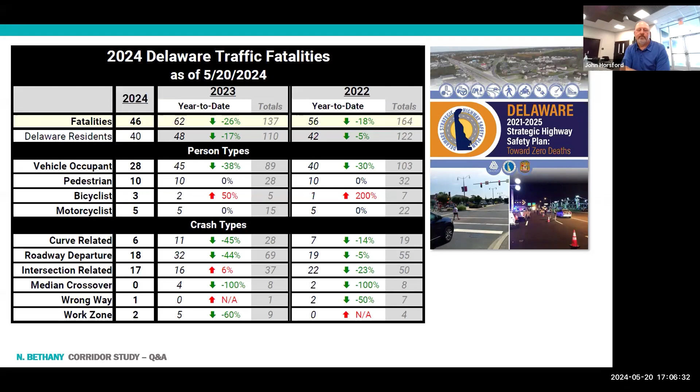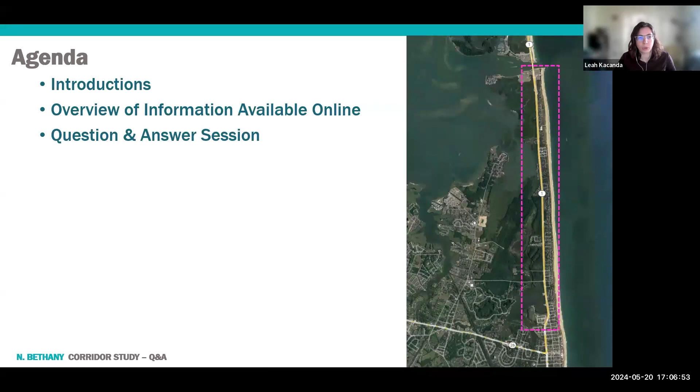So tonight, again, we're not going to go through the same presentation we delivered at the workshop, which is also posted online, but I do want to give you a high-level overview of what is available online, just to make sure everyone is aware of what they can find there, before we move into the question and answer session. But before that, I wanted to let you know who we have in the virtual room with us this evening, so we'll start at the top of the list.

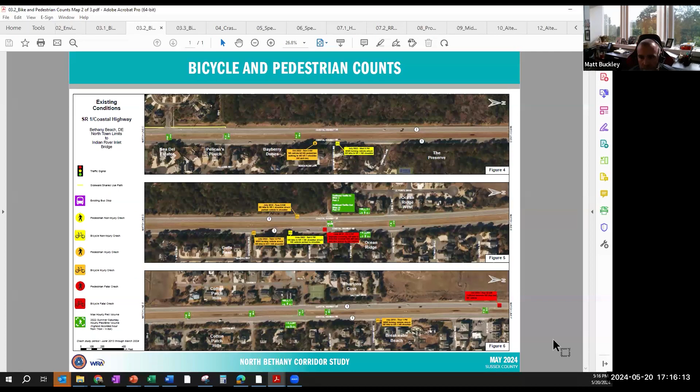It really comes down to the volume of pedestrians and bicyclists wanting to cross at North Fresh Pond, that's really the only location. The general rule of thumb to warrant a full red, yellow, green steady traffic signal is about 100 pedestrians and cyclists per hour. North Fresh Pond has about half of that, and Indian Harbor Village as well as the South Fresh Pond crossing are far, far below those numbers. So it really comes down to trusting the data: if a traffic signal isn't warranted, there are a lot of safety implications associated with installing one. Since volumes here, even at the highest hour in summer, are only about half of that threshold, that countermeasure of a steady traffic light is kind of off the table.

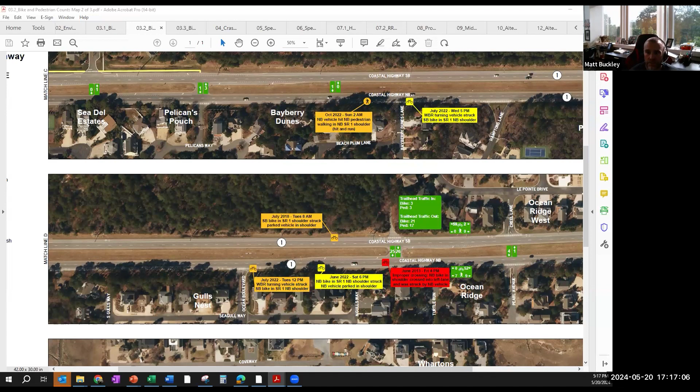When we look at pedestrian hybrid beacons, or HAWKs, we did a statewide compliance study, and it showed that not only are pedestrians and cyclists confused by that type of treatment, like we have a bit farther north on Route 1, but also motorists. So that countermeasure is more or less off the table too. That led us to the RRFB, which we've installed almost 60 of statewide, and the compliance there is very favorable for having vehicles yield to pedestrians and cyclists once they enter the crosswalk.

Thank you, Matt. We have a few additional questions on speed. One from Sarah: how much does it cost to reduce the speed limit, and how difficult is it from an infrastructure standpoint? Would DelDOT consider a lower speed limit on a seasonal basis?

From a cost standpoint, it's a few thousand dollars. It's really just a matter of the number of signs along the Route 1 corridor that would need to be changed in order to change the speed limit. Again, that few-thousand-dollar price range is a low cost countermeasure.

From an infrastructure standpoint for reducing speeds, that's part of the midterm recommendations—actually trying to provide some narrowing of the lanes with pavement marking improvements through various programs when the surface of Route 1 is repaved. That narrowing application tends to help lower speeds to more of the posted condition we're trying to propose here.

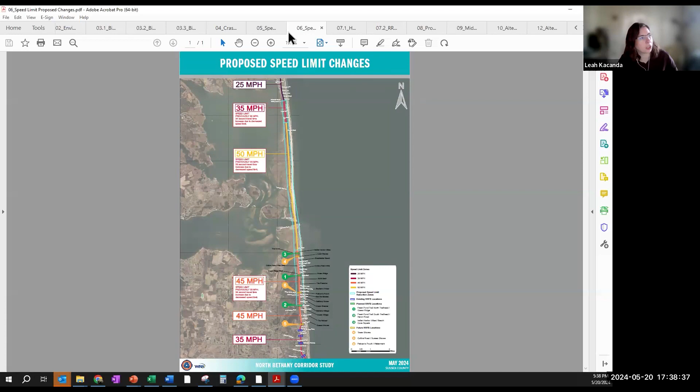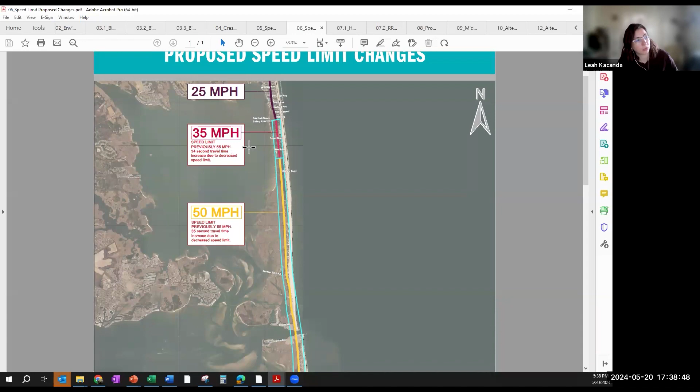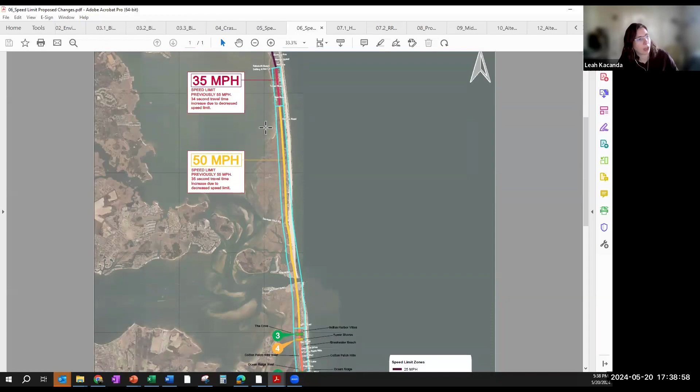We have someone on the chat asking about the proposal to lower the speed limit. I want to direct you to the project website. Once you navigate there, you'll see a board entitled Proposed Speed Limit Changes, number 6 in a series of 12 boards. It clearly notes the current speed limit and the proposed change. It starts at the southern end of Dewey Beach with a proposal of 35 miles per hour, up to 50 miles per hour through the Indian River Inlet Bridge, coming down off the bridge towards North Bethany, and then 45 miles per hour in North Bethany proper.

You may ask why we are looking at that whole corridor when this project is merely looking at the North Bethany area in particular. Peter, do you want to take a stab at why we are proposing changes between Dewey and Bethany Beach instead of just the subject area for our current study?

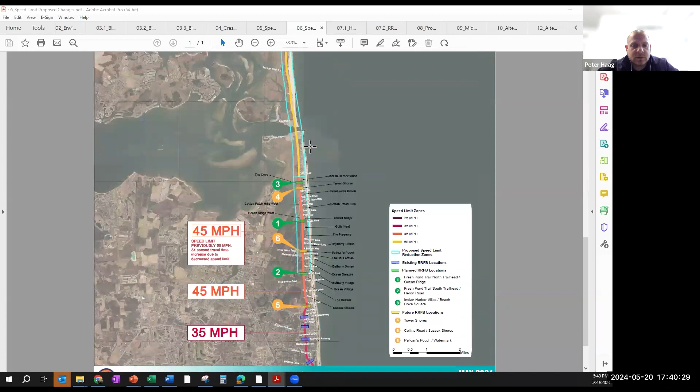This is where we look at things from a holistic standpoint. We know there's been historical discussions and concerns in that South Bethany area as you leave town. So we wanted to incorporate some of those concerns, as well as the various movements as you get closer to the IRIB bridge with the change. In the North Bethany area, we know the access points and usage, that context sensitivity component of the evaluation, is where a higher percentage of users are focused in, so that's where we drop the speed limit again. We took a larger holistic approach toward the area to come up with a proposed solution, which is what Leah's showing on the screen.

Thank you. And while I have you, Mark is asking why we don't just put in some speed cameras to address the speeding issue currently.

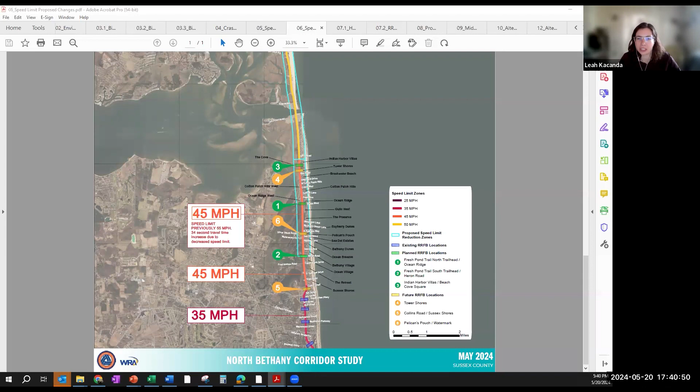Sure. So in June of last year, the department through legislation was able to pursue automated electronic speed enforcement, and its usage can be pursued throughout the state. However, the legislation only allows it to be pursued in work zones, DelDOT work zones, municipalities, or what are known as residence districts in the police jurisdiction of New Castle County. Areas that have police jurisdiction of Delaware State Police that are not within a work zone are not eligible based on the legislation. So in order to pursue electronic speed cameras, that legislation would have to be updated accordingly. We have, on our strategic highway safety plan website under the speeding emphasis area, our electronic speed safety program. It gives you a variety of information about the legislation, the regulation, frequently asked questions associated with the program, and how it's going to be rolled out and implemented and pursued by municipalities or the county in the future. So I'd recommend going to that website for more details. Thank you, Peter.

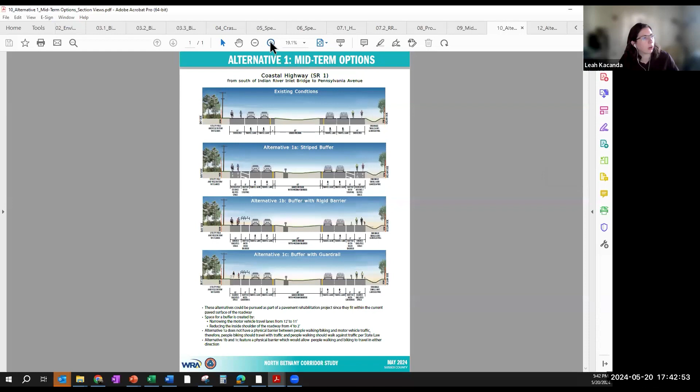Appreciate that. I have a couple questions about the mid and longer term improvements, basically looking at broader corridor-wide improvements. So I'm going to pull up our boards that show what we were talking about, and give you a bit of an overview. You'll see up here this top drawing shows the existing conditions out on the corridor.

Our midterm improvements take that existing pavement envelope, which doesn't change between all of these options, and basically propose a couple of straightforward things. First, we are proposing narrowing the inside shoulder, the extra space between the grass median and the travel lane, to 2 feet, taking the travel lanes down a foot to make them more narrow, and creating more of a buffer space between that outside travel lane and where people are walking and biking. Option 1A is merely pavement markings, so that could be accomplished with paint. Our other alternatives, B and C, actually consider having a separate guardrail or rigid barrier in that space to provide physical separation from traffic.

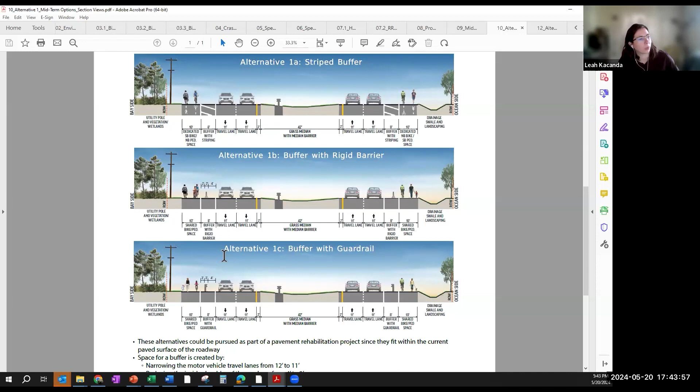The reason we're calling these midterm is because since we are using the existing pavement envelope, something similar to this could be accomplished during the next time the roadway is repaved. So obviously the most affordable option of those would just be paint only.

With some additional funding, there could be potential for a guardrail. So the question we have here is, what are the limitations to skip the midterm measurements and go straight to the long term?

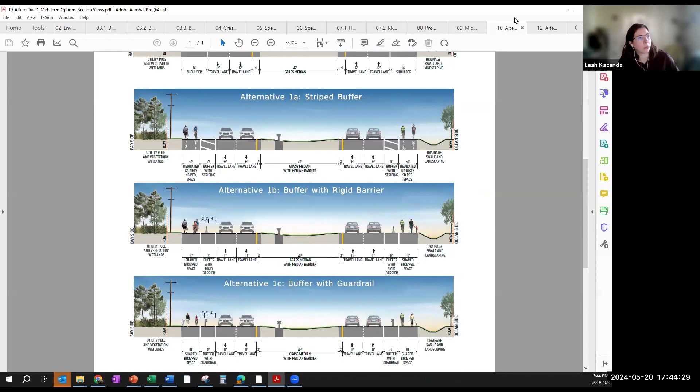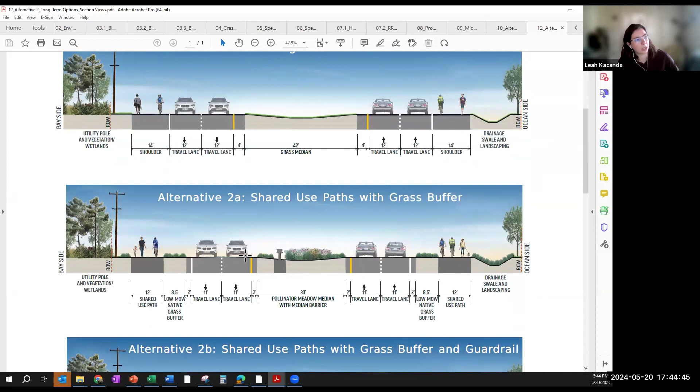Looking at those long-term improvements, you see our existing pavement envelope at the top here, and we are creating separate shared use paths. But in order to do so, we have to cut into our center median to create the space for buffers and make those improvements.

So here we have two alternatives. One has a wider grass buffer with a shared use path, and the other has a narrower grass buffer with a guardrail, physical separation, and a shared use path.

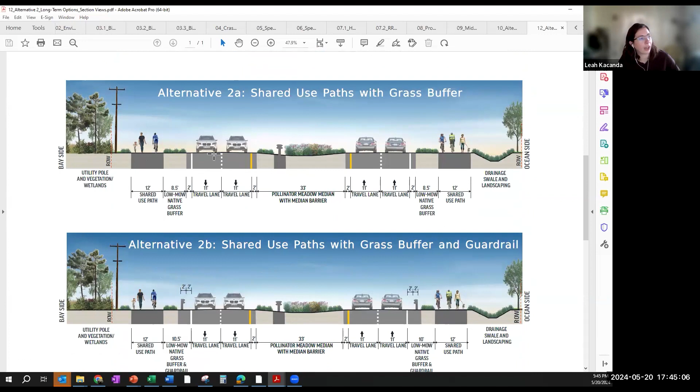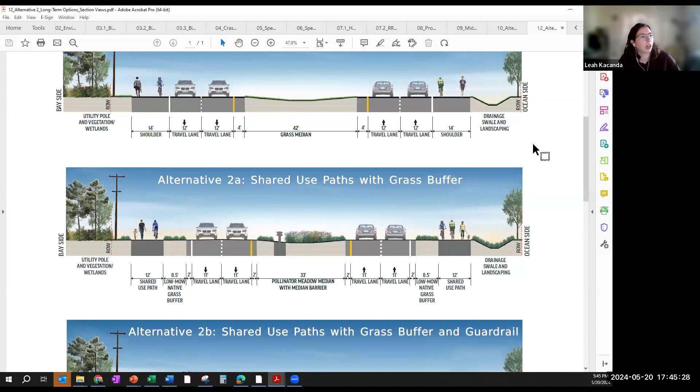Because we are going outside the existing pavement, that is going to be a much larger project. It's essentially a full roadway reconstruction, a much longer term project that would require very extensive funding. I'm going to ask Pam to chime in here, we have a couple questions in the chat about what the timeline would look like for implementing either the mid or long-term improvements.

Sure. As I'm sure everybody is aware, the short term is most of the time less expensive, easier to implement. The midterm maybe a bit more, in that 3 to 5 year-ish time frame, and then longer term more than that.

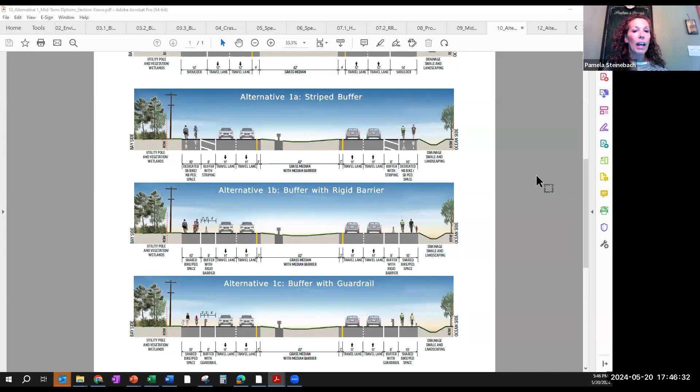But what we're doing now, doing this formalized planning study with the public workshops, with the input, ultimately is going to result in a finalized plan. And with a finalized plan that has gone through alternatives, looking at constraints, looking at what the cost estimates would be, the environmental implications...

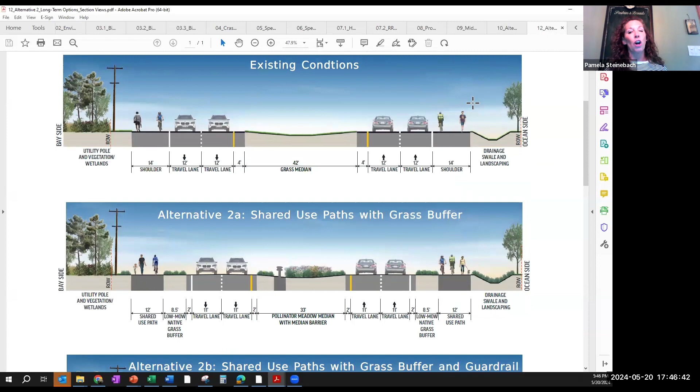Then with formalized alternatives, we can then look to possibly include projects into the proposed projects to be put forth and prioritized in our capital transportation programs. So what happens is that either MPOs or municipalities recommend things up to, well, right now there is no metropolitan planning organization in this part of the beach.

So what the municipality would do is, after the plan has been formalized, the municipality or the town or the residents can send that up during our call for projects to the county, and then they will have a prioritized list of projects that will be from this area. It can be from Lewes, Georgetown, all throughout the county.

And then the county looks at all of those projects, then they bring forth to DelDOT a list of projects that are important to the actual county. And that can be funneled or potentially funded in a few ways.

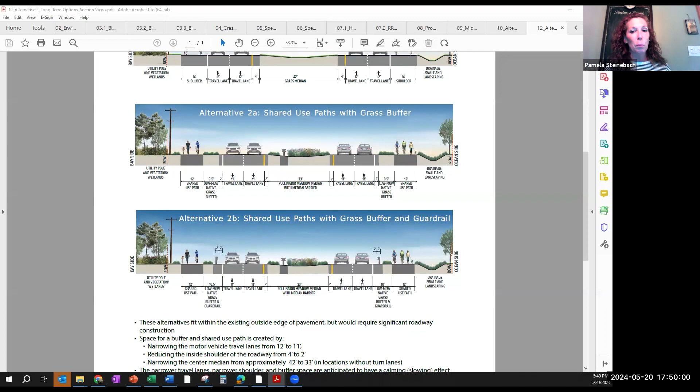I know you all got a 5-minute lesson on how an idea becomes a project, but that essentially is it. Once a project is in our capital transportation plan and then eventually gets funded, it can go into the preliminary engineering process and then have right-of-way acquired the construction cost estimates and such. So that's the normal life cycle of a planning project, going through all of the steps with the public process along the way to actually get built.

So the other option with that is being able to apply for a grant from the feds. There are a ton of grant programs out there, a lot of them being safety and bike and ped oriented. So the great thing about having these longer term ideas and projects in a plan, once our process is done, then we can apply for grants for those potential projects. And if we are awarded a grant, we could possibly fast track that project to be funded earlier.

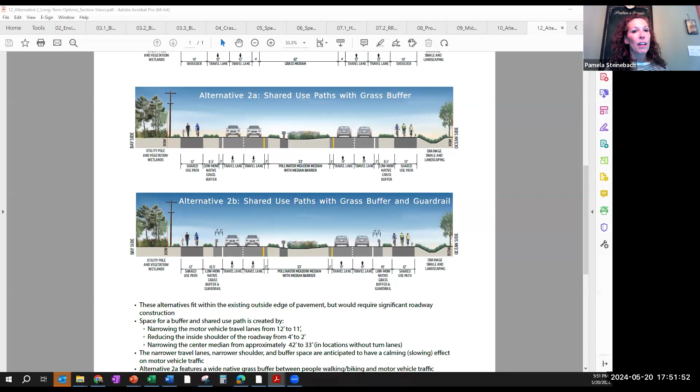I know that's probably not the answer anybody wants to hear about how long it takes to get a longer term project funded. Like Anthony, Leah, Pete, and Matt had said, there are shorter and medium term solutions that can be done earlier, but the longer term ones unfortunately have a life cycle that takes a while to implement. My apologies for taking so long to explain that.

No, Pam, thank you. That was a really great walkthrough of this process. And for those of you who are curious, there's a decent amount of information on DelDOT's website about the capital transportation plan process, and you can see what's in the budget right now.

I hate to ask you to put a number to it, but for a project of this scale, if we were to say go today, and the next time the capital budget is updated, long-term improvements were in there, approximately how many years would you venture to guess it would take if it makes it into the budget, once it's compared with and competes with all the other projects in Sussex County?

Sure. So realistically, we are in the process of the Council on Transportation approved the FY26 -- no, wait, hold on for a second, I've been on so many iterations, my apologies -- the FY25 to 30.

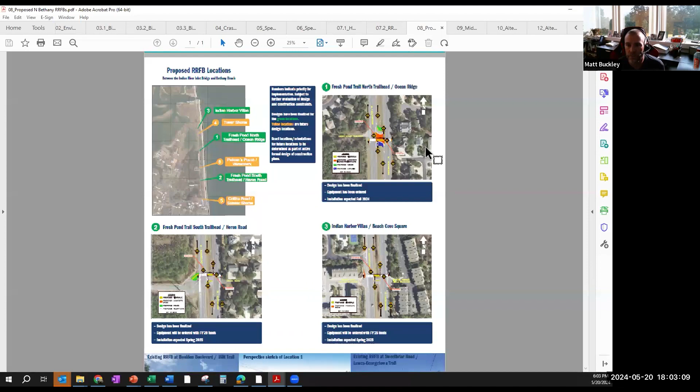So the design that we're proposing for all 3 of the upcoming RRFB projects, they're all overhead. So we'll have a steel arm that reaches out to the center of the 2 lanes, one on each side, northbound and southbound. You'll have flashing lights overhead. You'll also have them in the median, flashing side by side, and then we'll have them about 400 or 500 feet in advance, indicating there's a crosswalk ahead, and it'll be lit up and flashing when a pedestrian or cyclist presses the button. So we do recognize that sight lines can be blocked at times. We do recognize it's a higher speed facility with multiple lanes. So we're throwing everything at it here in terms of all the statewide installations we've done.

We have a handful of overhead locations that we've tested compliance on. We have 1 or 2 with those ahead-in-advance RRFBs as well. So we're trying to capture everybody's attention as best we can with as much light as we can.

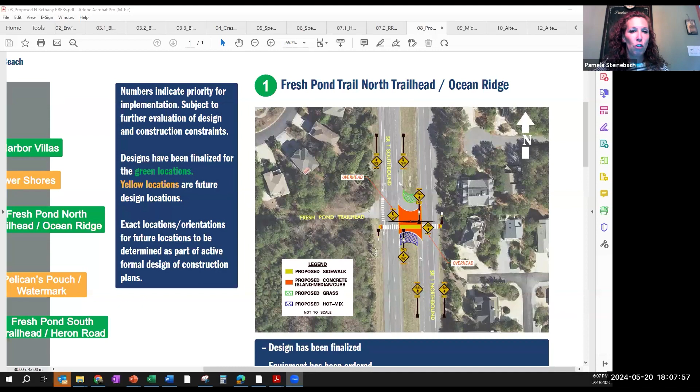That would be great. Whoever asked that, it would be great if you put that in the public comment form so that we can follow up with our utility section. But I'm almost positive that is the path in any type of undergrounding of aerial lines.